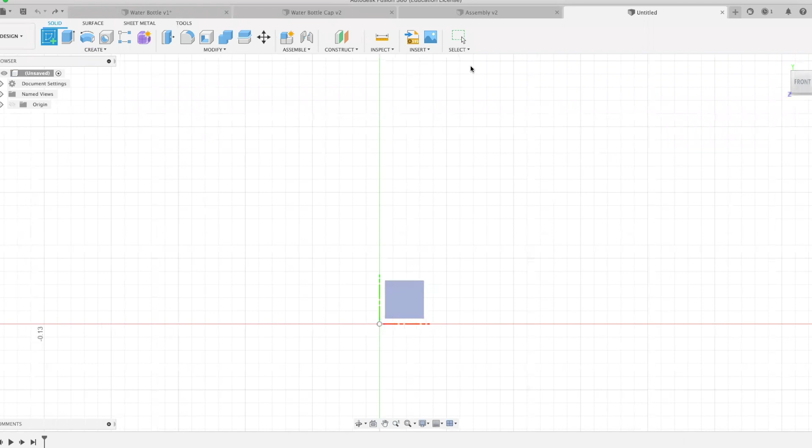So to begin, I'm going to create a new sketch on the XY plane, like that.

We're going to be using the revolve feature to create the water bottle, so I'm going to make about half the shape of it. I want the diameter of the water bottle to be 3 inches, so I'll make it half of that, so it'd be like 1.5 - 3 divided by 2.

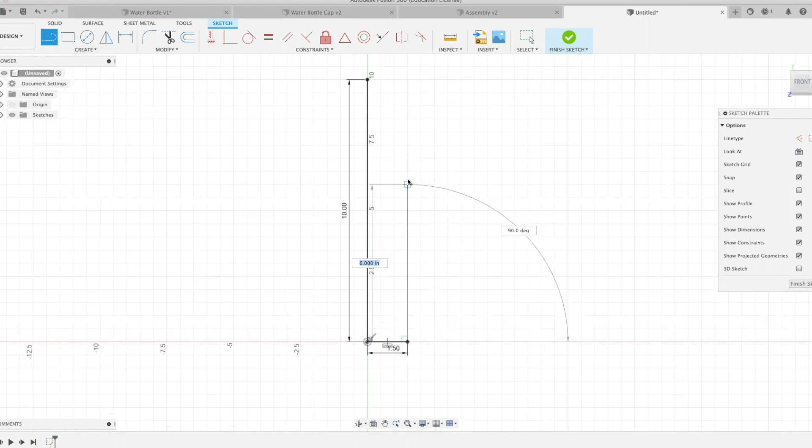And then I want the height of the water bottle to be 10 inches. Create a line like that, and I'm gonna make something like that.

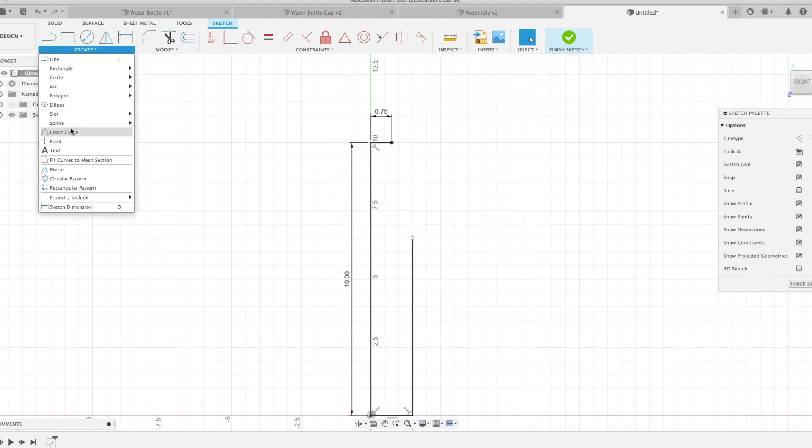And then this will be 0.75. To create that curve of the water bottle, I'm going to use the spline tool, specifically the fit point spline, so I can get more of that curved shape. Once you have it how you like, yeah.

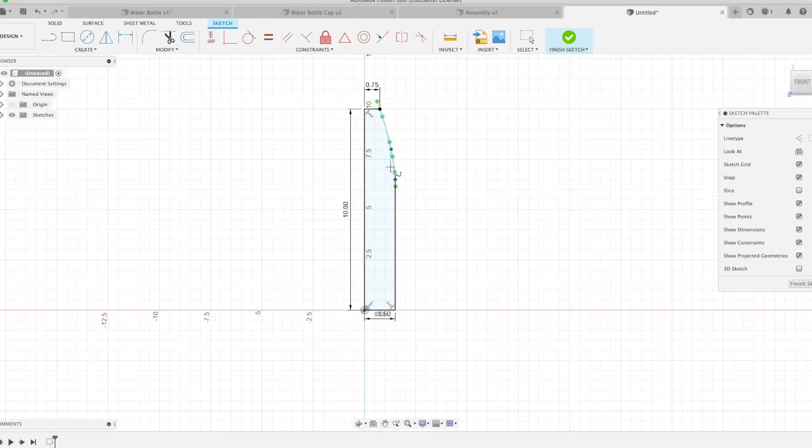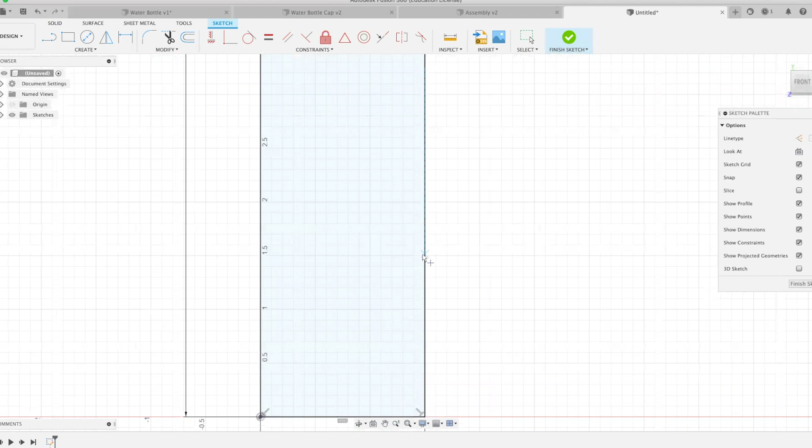There's also a small indentation for the bottom part of the water bottle, so I'm gonna make a little triangle right here for the indentation. I'm going to create a point probably right here, like that. Then we'll take the line tool, go like this. Under modify, you can find a tool called trim - it has a scissors icon - and you can just cut away the material right there.

Once you have part of your water bottle done in your sketch, click finish sketch, click on the shape, click on the revolve tool under create, and then click the axis - the axis will be this right here, where it revolves around. I'm gonna click that, and then...

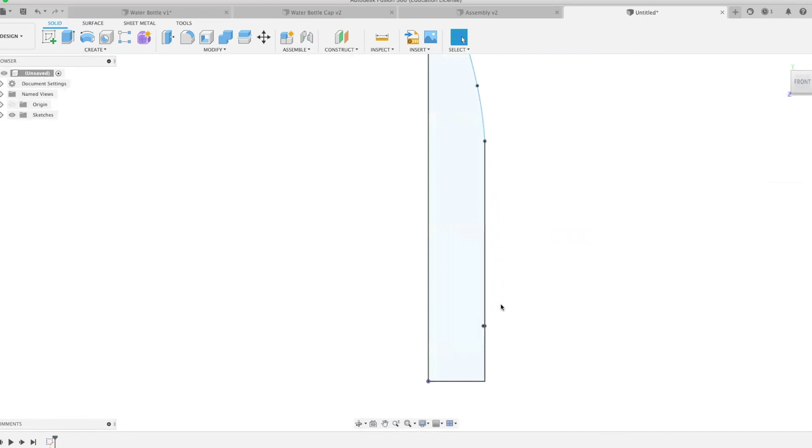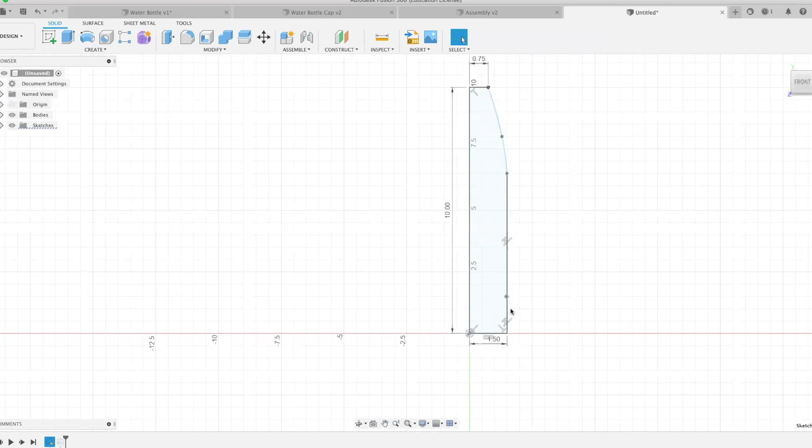Hold up, but yeah, I can just see it. Revolve, axis, click OK. See right here, my indentation is bigger than I anticipated, so I can just go back to the sketch and edit sketch, and quickly fix that.

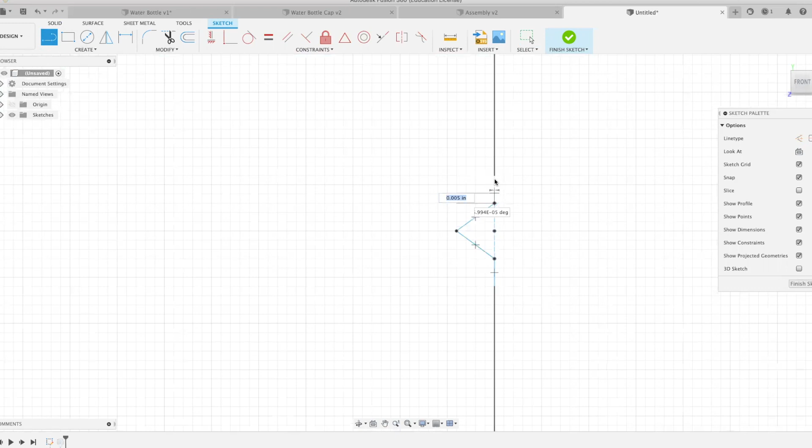So it can be more of something like that - yeah, that's kind of better.

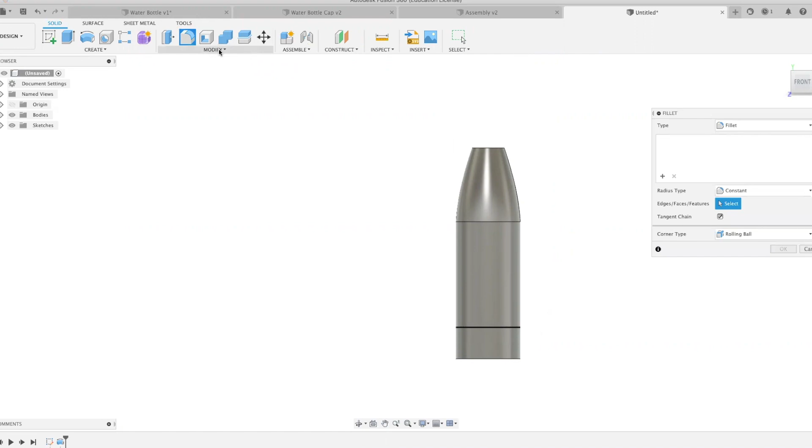Once we have kind of the shape of it, I'm going to select the bottom edge here and click on fillet under modify, click the bottom here, kind of just adjust it like that. Click OK, and then we can go ahead and make the top part of the water bottle.

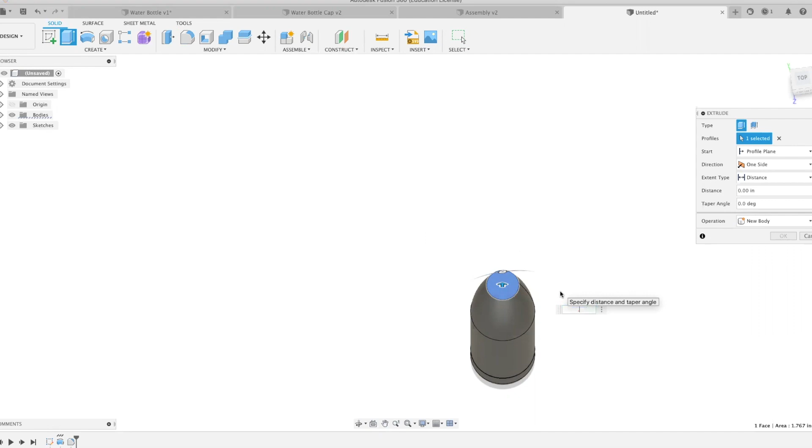I'm just gonna click on this and click E for extrude. To a point, let's see, do 1 inch and click OK.

So this is the base part of the opening of the bottle, but we're gonna make another thing on the top. I'm just going to create a circle. Your circle right now doesn't matter what size it is, because once we thread it, Fusion will change the size automatically so it works properly.

Then you're gonna extrude this as well - I think 0.5 is fine. Yeah, 0.5.

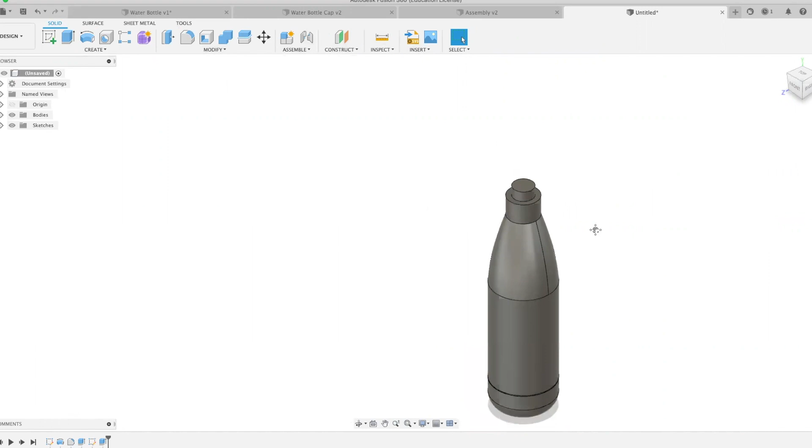And then we're gonna go ahead and shell the inside of this, just like how we did in the perfume bottle video. You click at the top opening. I want this 0.05, and then I'm gonna click OK.

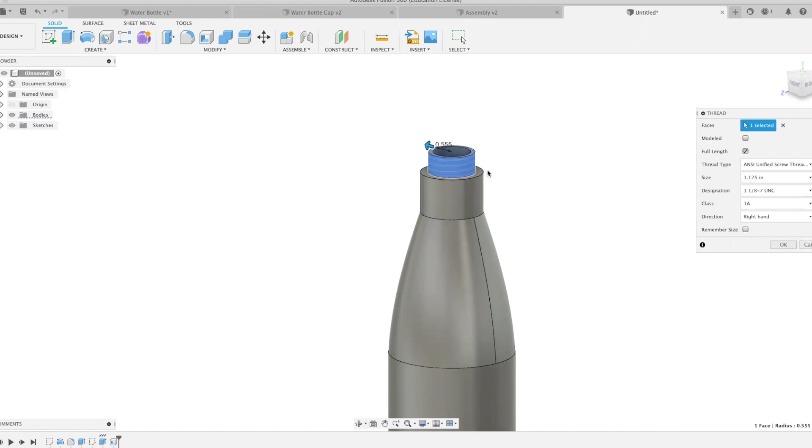So then next we're going to thread this opening. You just go under Create, click Thread, click the outside right here, and then I want the size to be 1.125 inches, and automatically it makes it larger like this. Then I'm going to click OK.

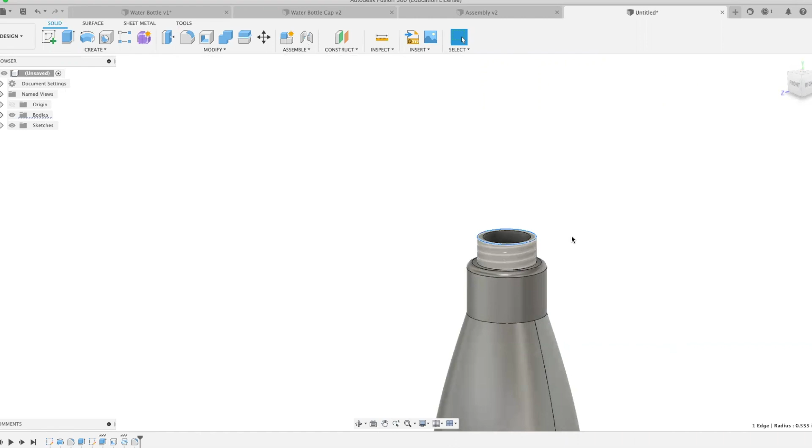Next I'm going to round these edges right here just so it gives it a nicer, cleaner look. I'm just going to move it until I like it, and then I'm also going to do this edge right here. Click on Fillet. There we go, and then click OK.

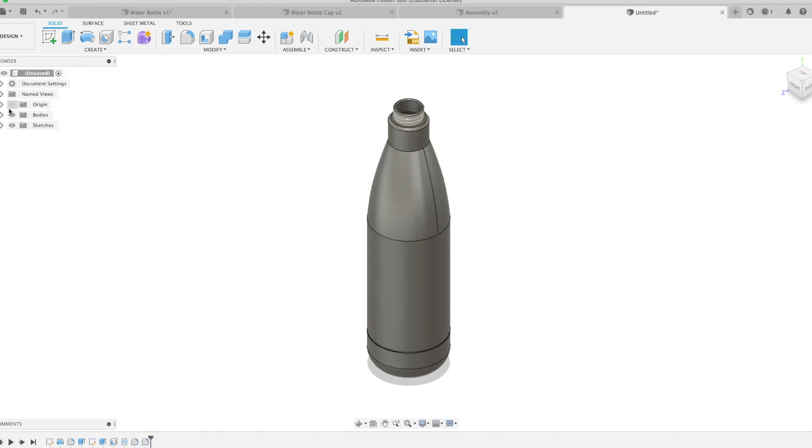Next we're gonna change the material and appearance of our water bottle. I'm gonna go under bodies, right click on body 1, go to physical material - it is a metal water bottle, so I think I'm just gonna do aluminum, just aluminum right on top, just like that.

Now we can change the appearance of the water bottle, so you just go under body, appearance, and you can do something like... let's see, under... how about, let's not do plastic, paint. Let's do a metallic-y color, you can throw it on just like that.

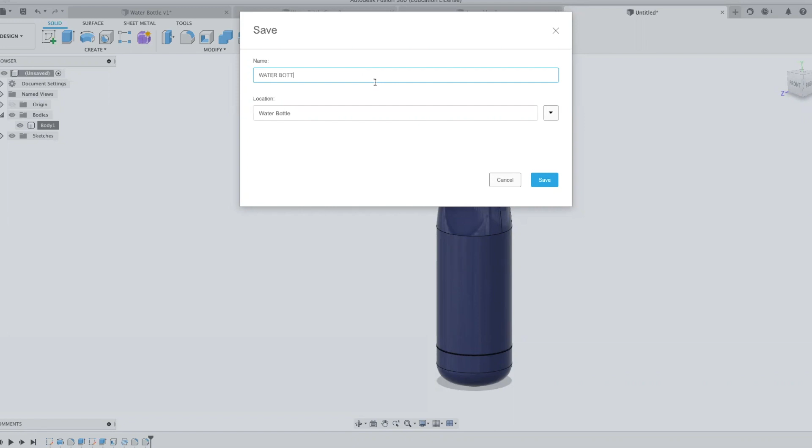So now that you have the water bottle, we can go ahead and save it - water bottle - and then create the cap.

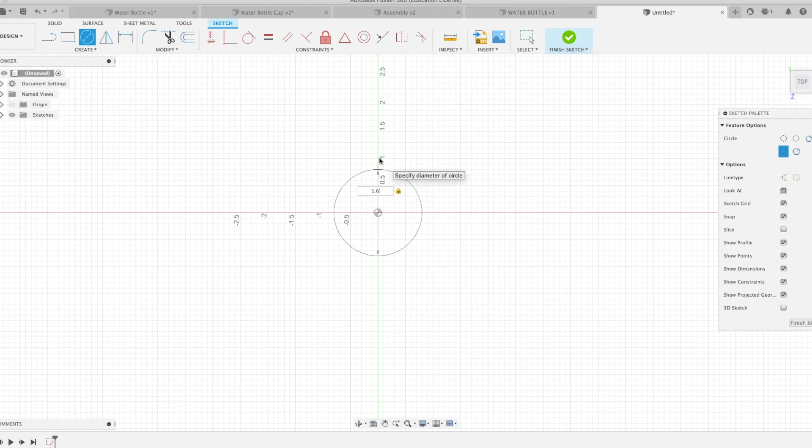Okay, now moving on to the cap of the water bottle. I'm going to create another sketch using the XZ plane, and then I'm going to create a circle - I am creating it's going to be 1.6. Enter, extrude, and then it's going to be 1 inch.

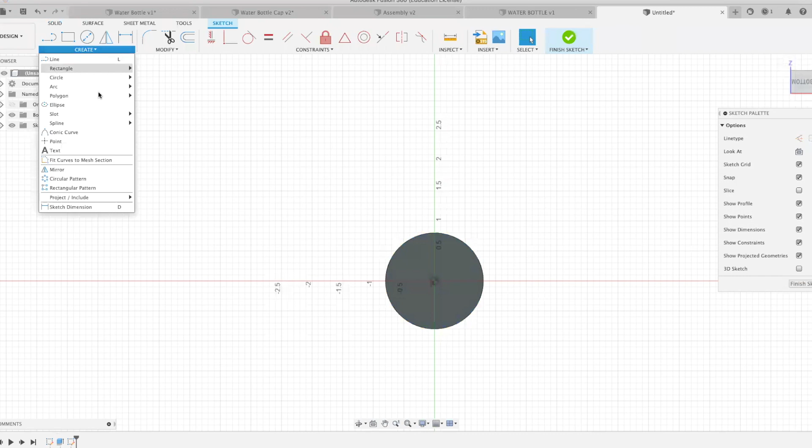Okay, so now we can go ahead and create the hole for the cap so it can screw and fit onto the water bottle perfectly. I'm just gonna go to the bottom, quickly create a sketch and make a point in the center like that. Finish sketch, so then we know where our hole will go.

So under create, you're gonna click on hole, click on that point, and then I already have the settings in and it's correct, but what you're gonna do is it's gonna be a simple hole. It's gonna be tapped, and then full, and the drill point will be flat. Then select the size that you had when you threaded the cap or opening, so it will fit properly. I'm just gonna click OK.

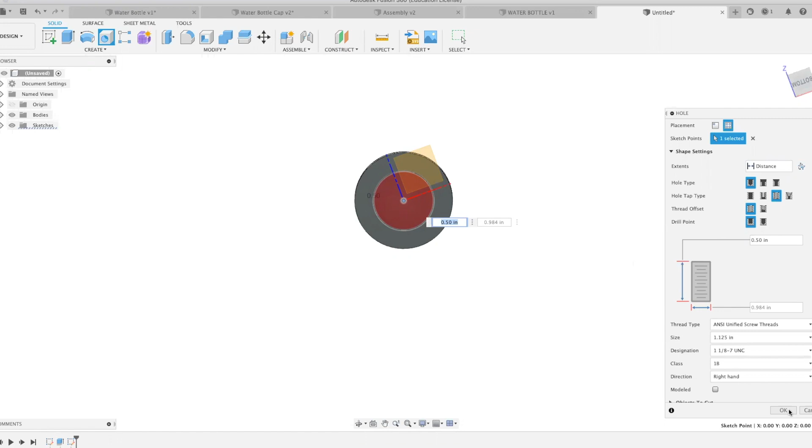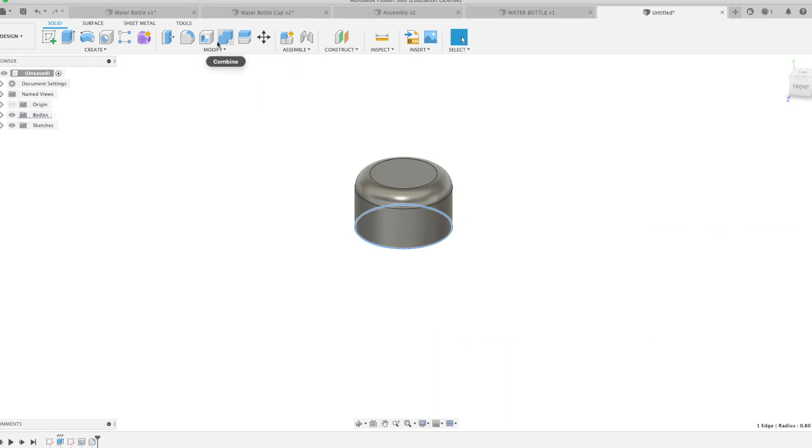Okay, so once we have that, I'm going to go ahead and round these edges. I'm just going to bring it in like that. Click OK, like this. Also round it. Yeah, just like that. And then click OK.

And then I can also change the material of this. So I'm just going to under bodies, right click, physical material. I think I'm just going to put the same material as before on it, aluminum. And then save it as water bottle cap. Click enter.

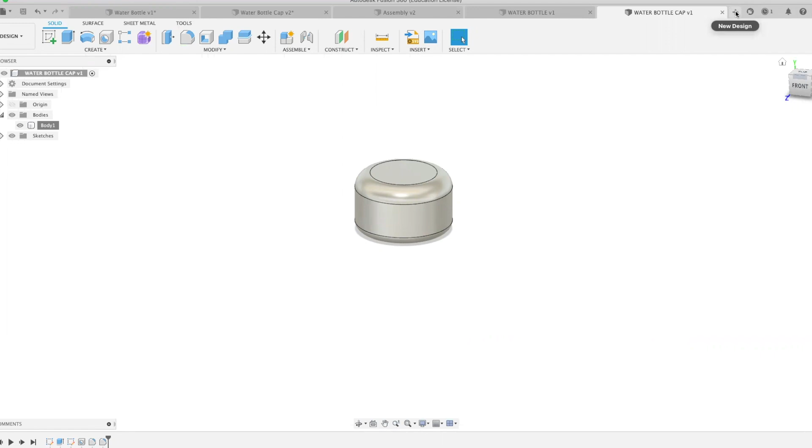And now we're ready to assemble. Okay, so once you're done with creating both the body of the water bottle and the cap of the water bottle, you can go ahead and make a new design and then save it. And then you can go ahead and call it like assembly or water bottle assembly, like that. Enter.

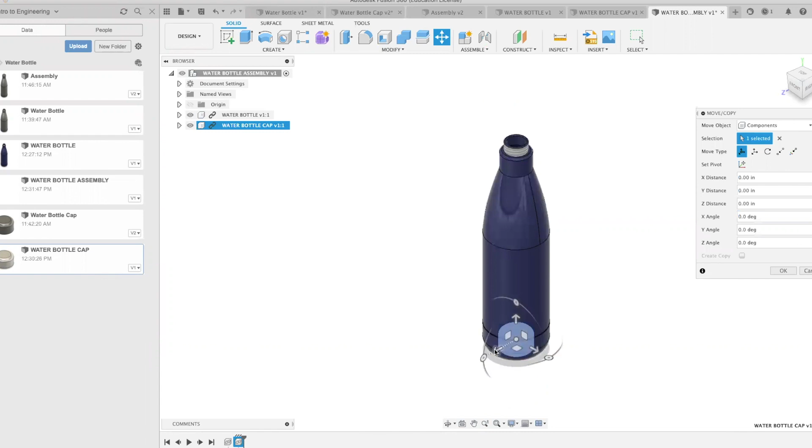And then we're going to go ahead, you can click and drag if you have a Windows laptop or device, but I have a MacBook, so I'm gonna insert into the current design by right clicking like that. Okay, and then do the same thing for the water bottle cap. I'm gonna drag it off to the side so it's easier. Click OK, and then now we can assemble.

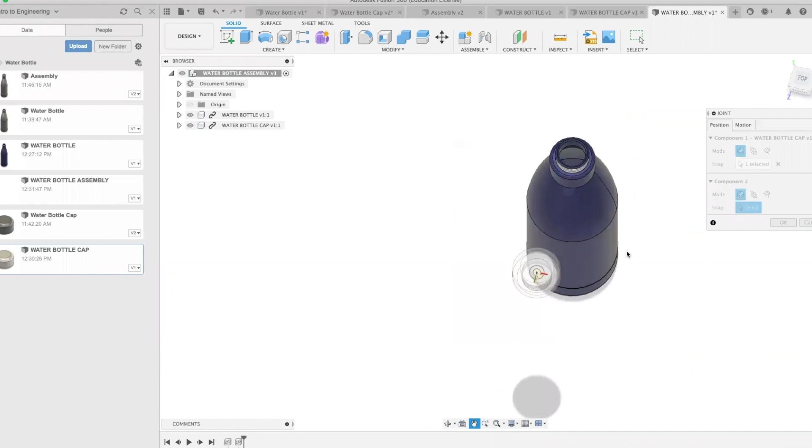So like the perfume bottle, we're gonna use the joint tool under assemble. Just click there. You're gonna click on the two points you want to join. So I'm gonna use this inside part of this cap and the top part of the water bottle.

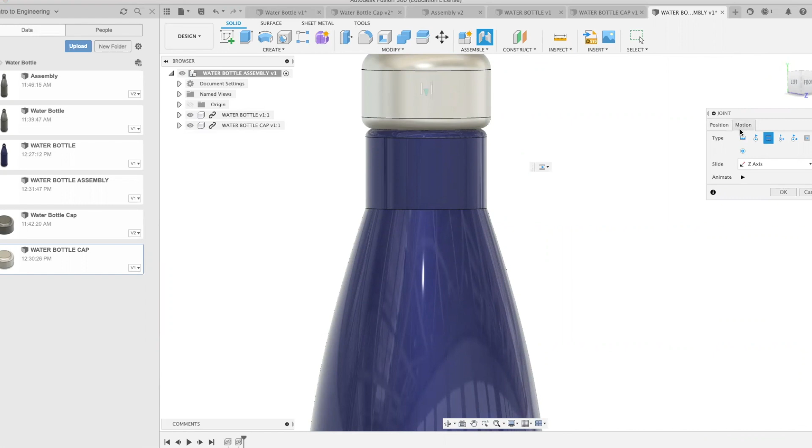Okay, so once it's on like this, you can also go ahead and add your motion or your type of joint. So it usually defaults to rigid, but I have it on cylindrical, because you can screw it on and off and it can go up. So to animate it properly, if you see it goes through the water bottle, just change the axis to custom.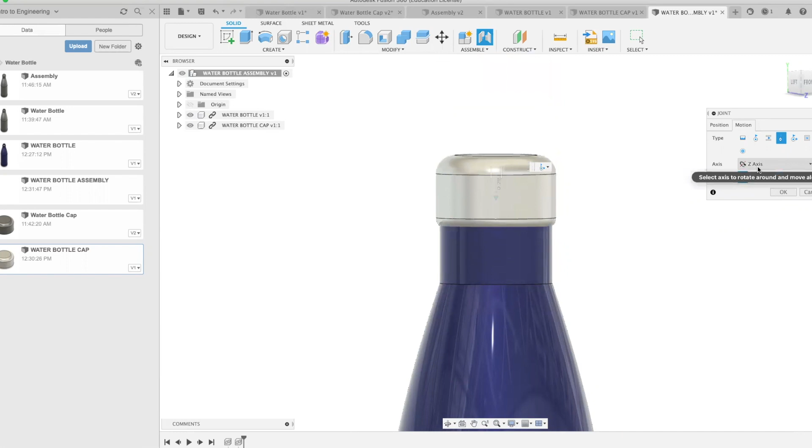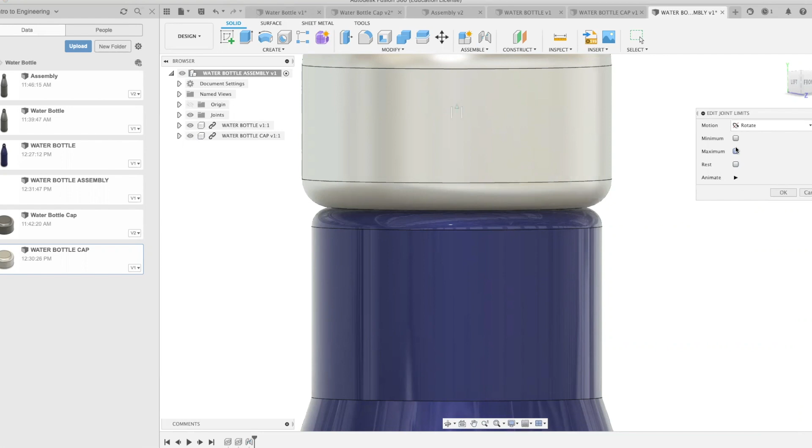Just select it like this, click OK, right click the joint you just made under the timeline, click edit joint limits, set a minimum, and it can just be 0 degrees, click enter. And then if you go to animate again, it should— whoops, that's not right. Edit joint limits, it should not be a maximum. I don't know why it's doing that.

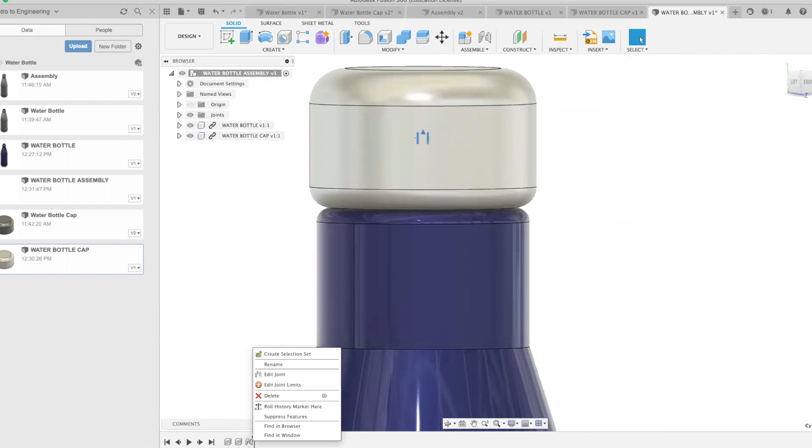Oh, slide. Yeah, change that to slide. Click minimum, you can select somewhere. It should just be 0, I think. Click enter. And then let's see if it works now, because it should work. Okay, yeah, so now it works. So if you can see, it is rotating as well as going up and down, just like how you would screw it on and off.

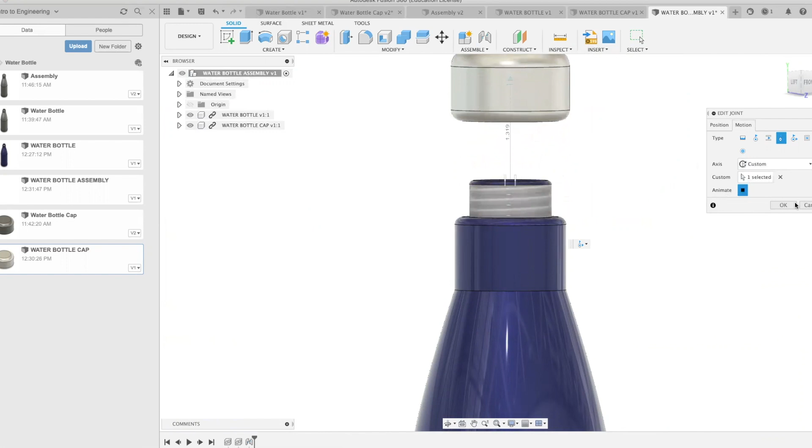So then I'm going to click OK, and then we can save it. And there you go, you have your water bottle.

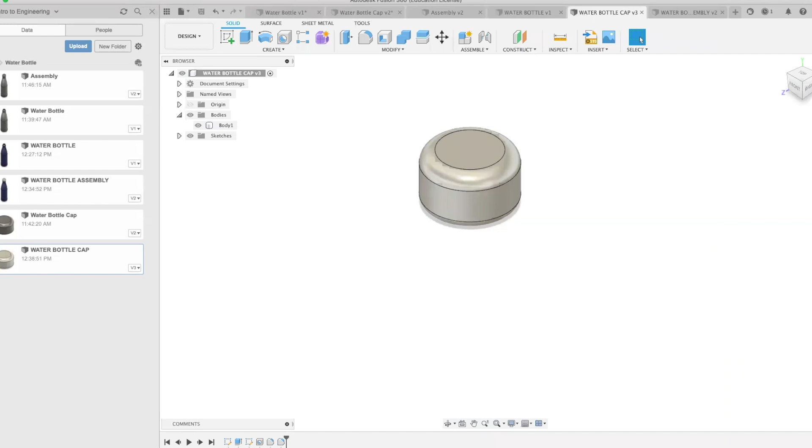Okay, so once you guys have finished assembling your water bottle, we are going to create the multi-views for them. So I'm going to first start off with the multi-view of the cap because I believe it would be a lot easier to dimension and see all the different dimensions.

First thing I'm gonna do is we're gonna need a front view, a top view, and a right view. So since we have a hole at the bottom here, it'd be much easier to dimension the hole if this was the top view. So it doesn't have to be the orientation of how it naturally is placed, it can be changed. So I will be changing the orientation of everything.

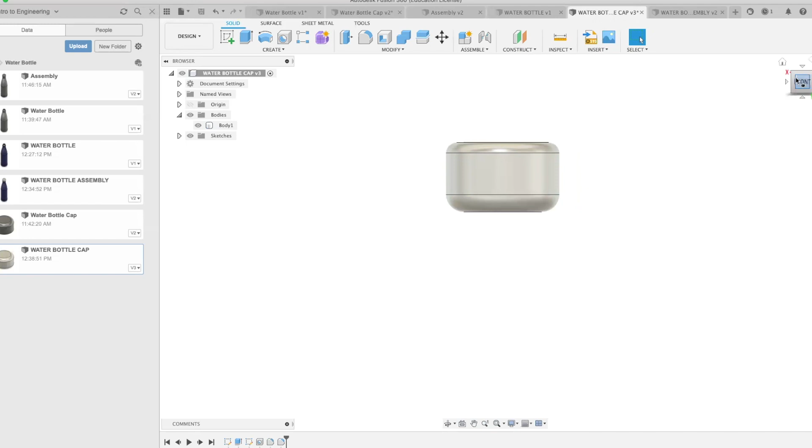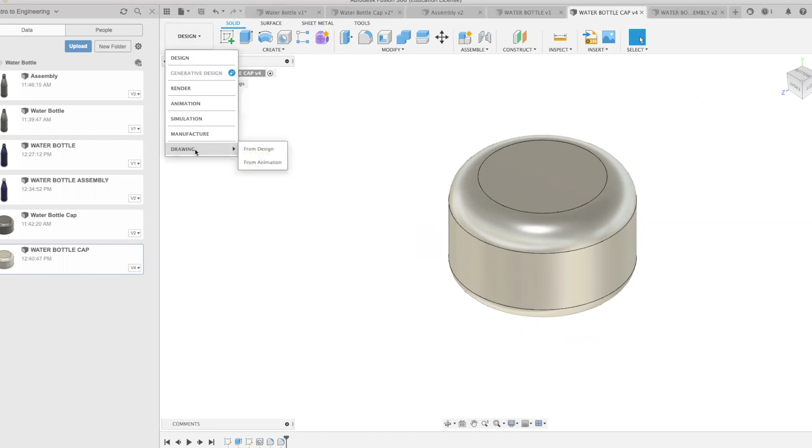So I'm gonna make this the new front view, so I'm gonna set current view as front view. So then this would be top. Okay, perfect, and then save. Okay, so once you have the orientation of where you want your object to be, I'm going to go ahead and click on design, go to drawing from design, and then we're going to create our drawing. I am using the Walton drawing template, but you can just create one from scratch, and click OK.

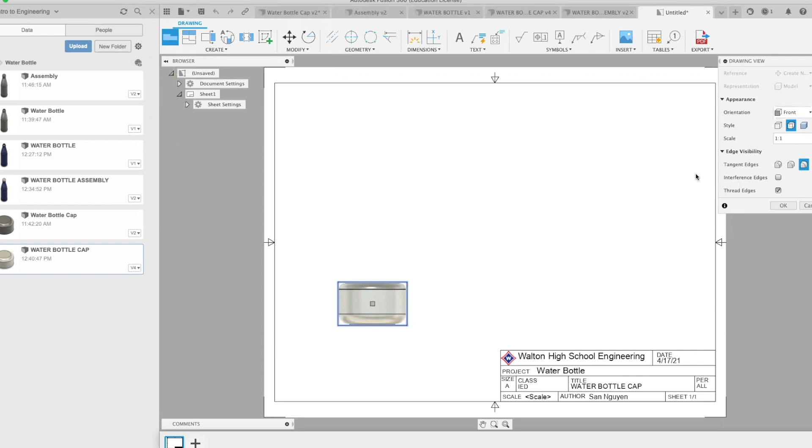So to create your multi-view, first you want to place your base view at the bottom left corner, like this. You can change the scale, you can change the orientation from here as well. And then I'm gonna click OK.

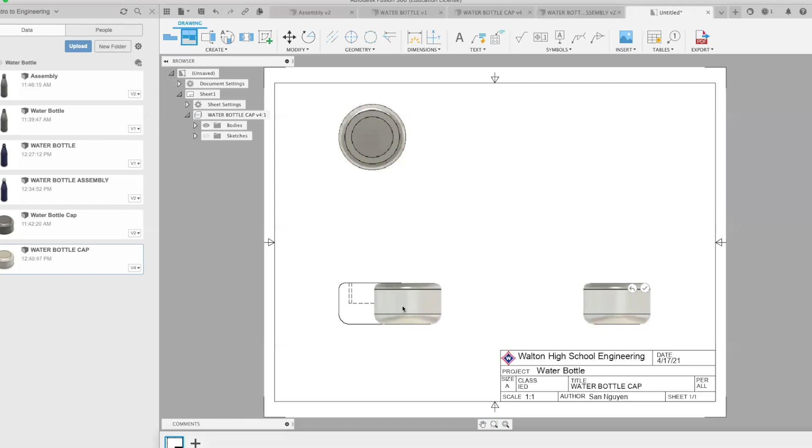From here, I'm gonna click on projected view, click my base view, and then we're gonna create our top view by dragging it up, our right view by dragging it to the right, and then our isometric view. I'll put a check. For the isometric view, you can double click and change it to shaded because we're not going to be dimensioning this. This is just like a representation of our object. And then we'll click close.

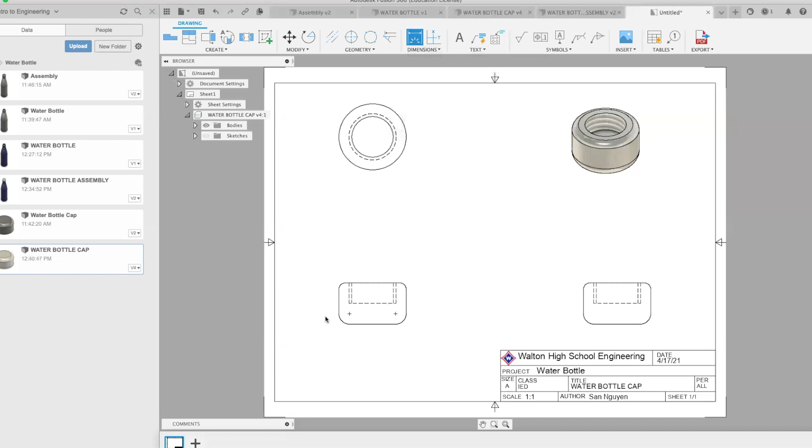Okay, so to create a dimension, you can go right here under dimensions and just click the icon dimensions. And if I wanted this height, I can click the bottom line like this to the top line and drag it to the right. Now we have our overall height.

So to dimension a hole, such as this one, the first thing you want to make sure is to create a center mark. That's going to be like an X in the center. So you click on the outermost circle shape you have, like that, and then you have your center mark.

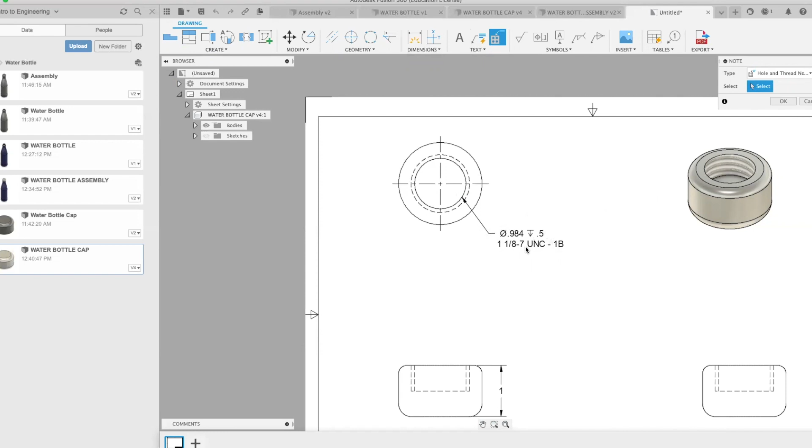From here, you can then dimension it. But instead of clicking here, you're gonna go under text and it's gonna be hole and thread note. Click on this. I'm gonna click here and do it like this, then place your dimension. So here it will have the diameter of your hole, how deep it went in, and what it was threaded by. And I'll click OK.

Next you want the diameter of this outside part. You could get it from here by doing this side and this side to get the overall width of it. But since it is technically a circle, it would be better to dimension the circle, so you'd get it as a diameter. So you can just go to dimension, click on the outside like this, and then it has the diameter symbol right here. You don't need it twice, so you don't have to do the overall for this one.

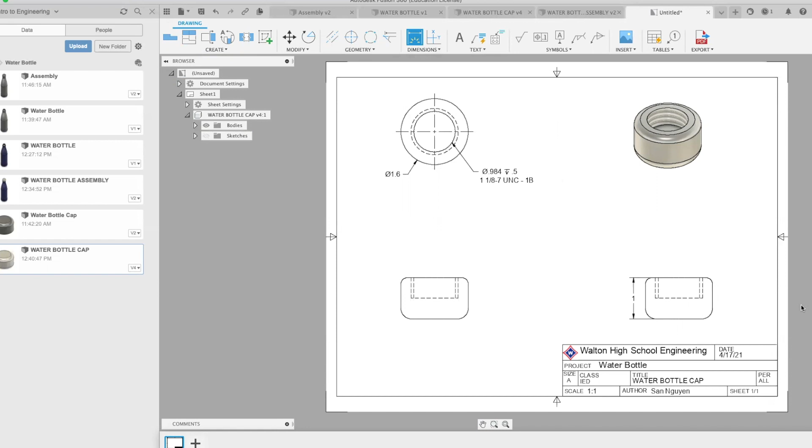Okay, we can also dimension the rounds or the fillets. I'm going to actually move the dimension of the overall height over here to make it easier. But we can go ahead and dimension these sides like this and click the bottom here like that. So once it's fully dimensioned, you can go ahead and save it.

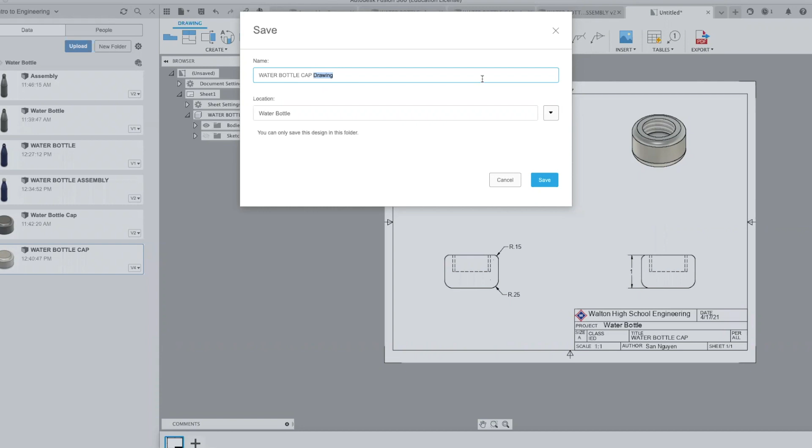I'm gonna save as water bottle cap multi-view. And click save. And then we're gonna do the same thing with the water bottle itself.

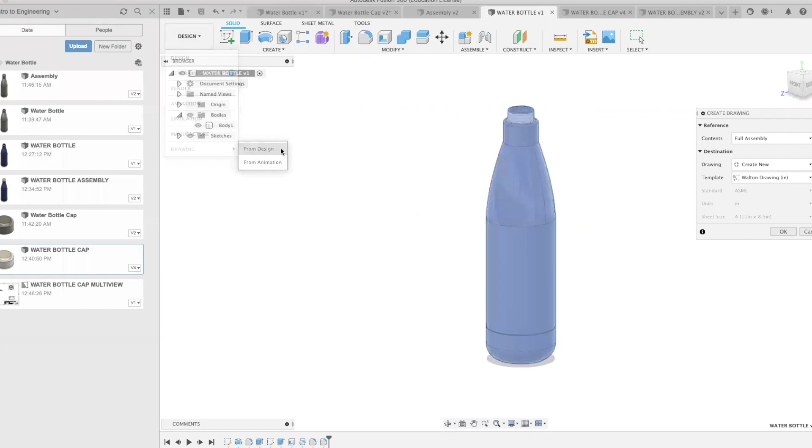So with the water bottle, we're gonna do the same thing. We're gonna go back to design, drawing from design. Whoops, it does not want to collaborate with me from design. And we're gonna create, click OK.

We're gonna place it. I'm gonna change the scale size a bit so it's a bit larger, like that. And click OK.

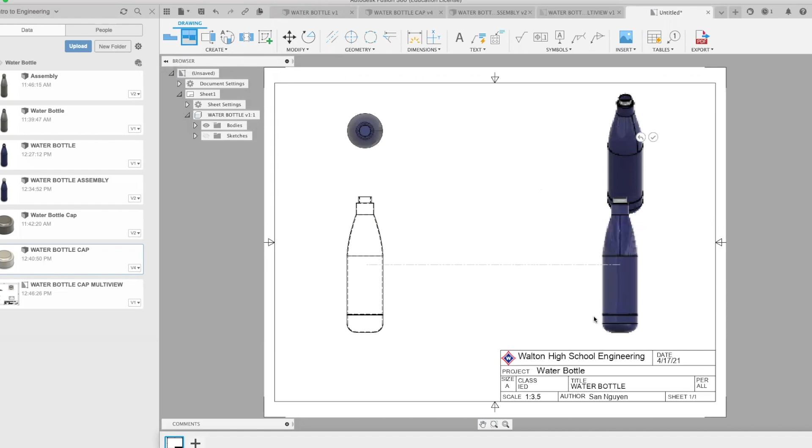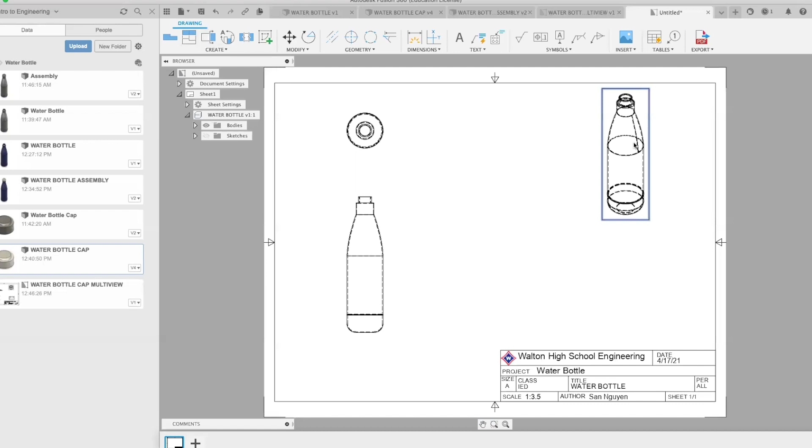And then we're gonna do projection of the base view. We get the top part, isometric, and then the right. So if you see here, the front view and the right view are identical, so the right view isn't necessary, so you can just delete it. So then all you'll need is the front view, the top view, and then the isometric. I'm going to change this again to shaded, click close, and then we can dimension this.

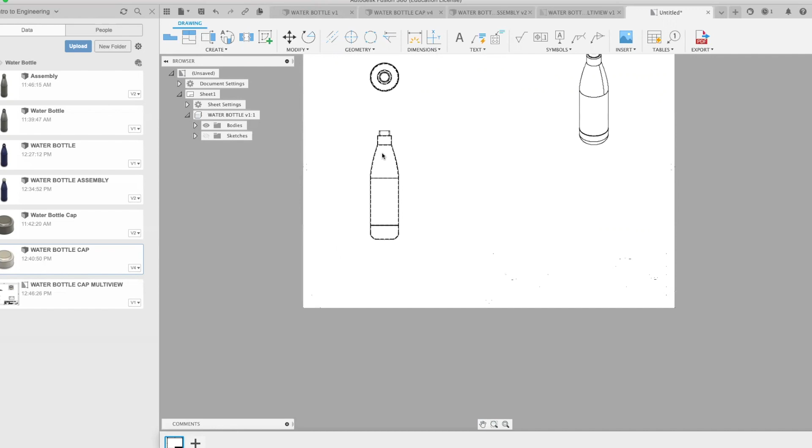So if you remember, the dashed lines here are the hidden lines. These are what you cannot see because there's empty space in the center. If you remember how we shelled the inside, what you can do so you don't have to see all the shell or the hidden lines is turn off the hidden lines, but you still need to know that they're there.

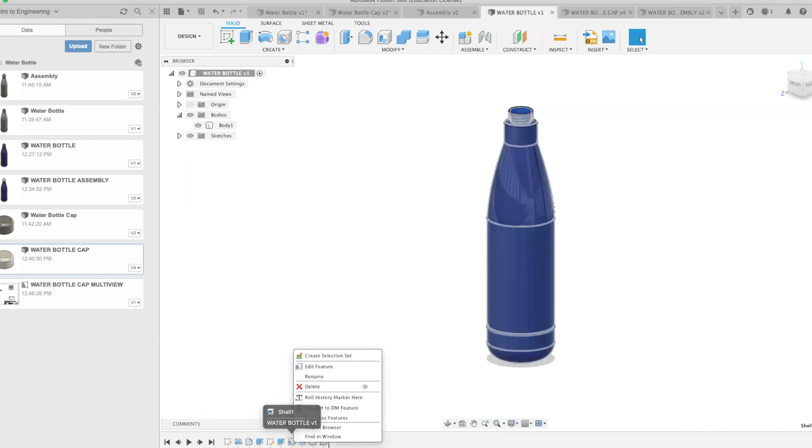So you can just create a note at the bottom left of your drawing or your multi-view. Let's go back to see what the shell was. Okay, so we shelled it 0.05. So you can just write that.

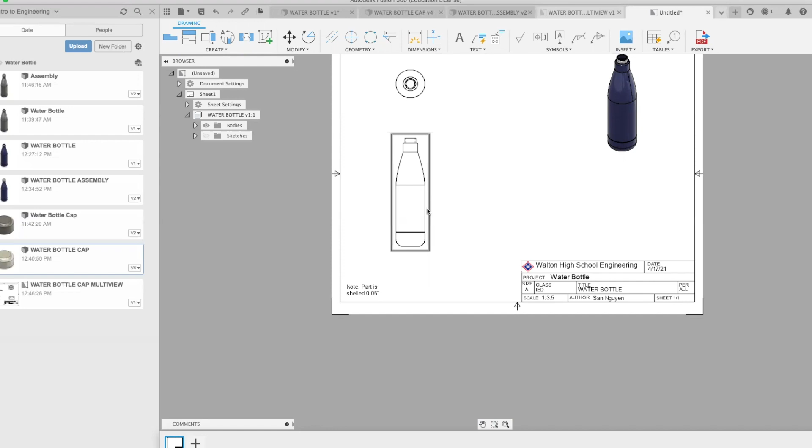So you can go down here, go to text and then add text like that. You just put a note, saying part or object is shelled 0.05 inches, and you just leave it like that. So then you know that it is empty in there.

Okay, so once you have your note here, we can go ahead and start dimensioning our object.

When you make a multi-view, you can also make different views, such as a section view or a detail view. I think what's necessary is going to be a detailed view so we can show the dimensions for this tiny part right here.

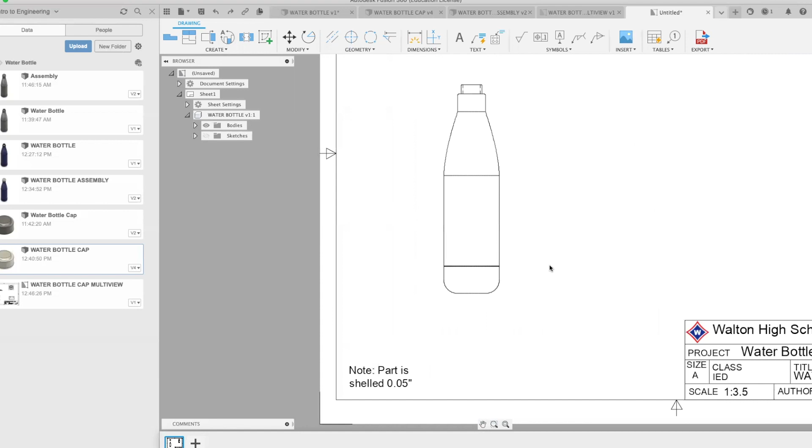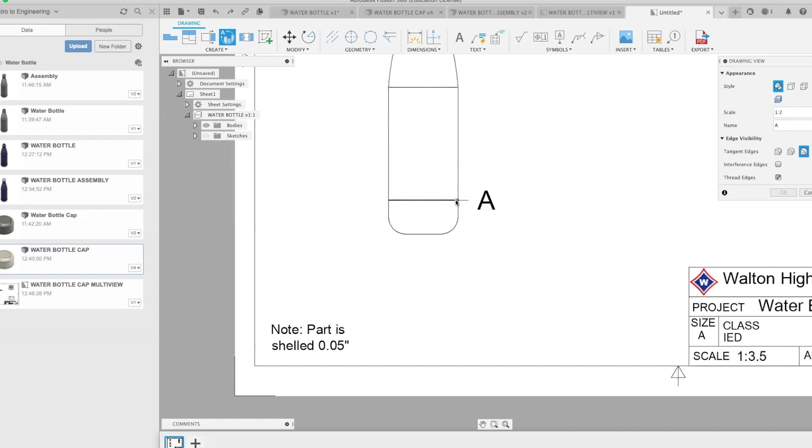So I will show you how to do that. We're gonna click on detail view, go to this corner right here, select the parent view, click right here where we want it, and you only need to show as much as you need to dimension. So just like this. Since we don't have a right view, I can put it in any area over here, or something like that. And then click OK. So this is very, very tiny.

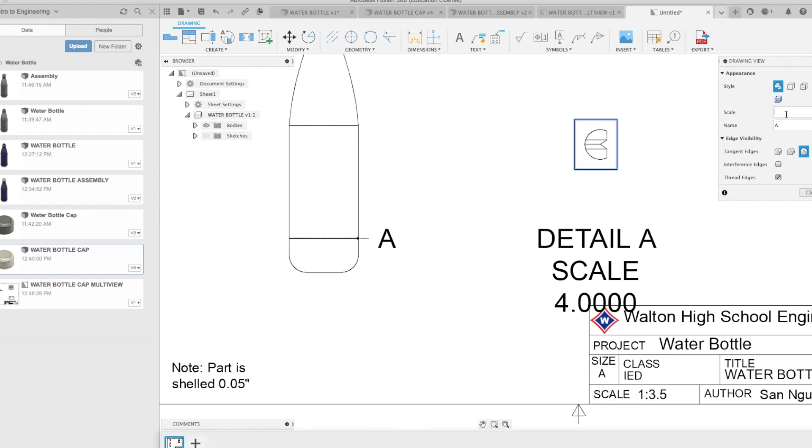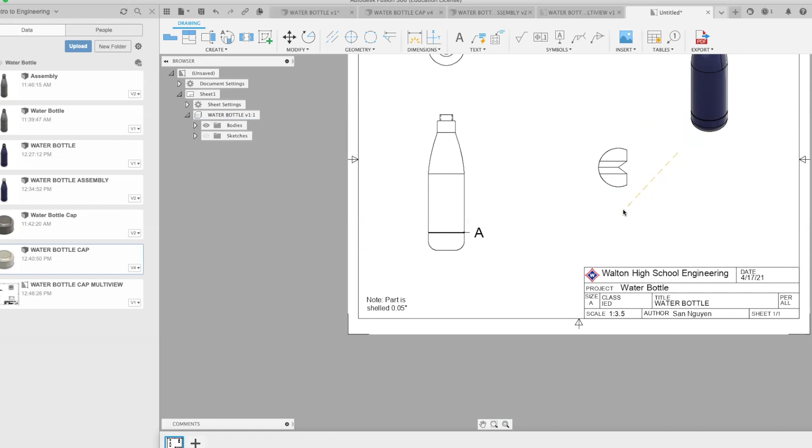I'm just going to switch up the scale to something like this, it could be bigger, like that. So you can adjust it, place it wherever you need it to be. You can also put its label under it, next to it, and then move it all around.

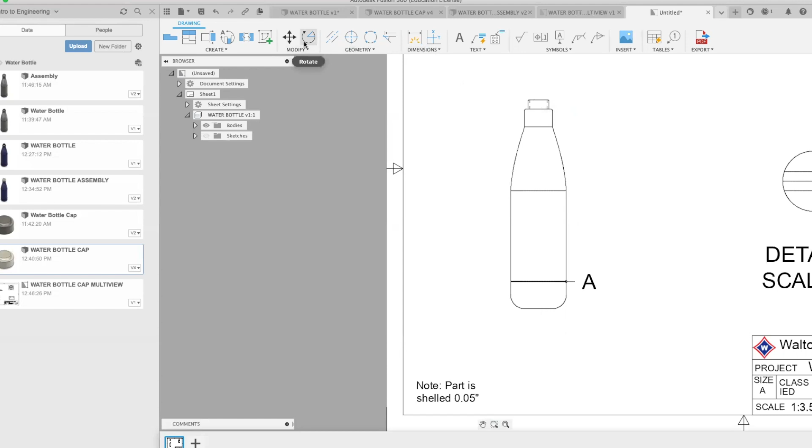Then we're going to dimension that after, but first we're going to dimension the front view. In the front view, we can dimension the overall height. Actually, before doing the overall height, we can do all the smaller heights. So you can do the height right here. I'm just going to do the center part, like that, and pull it to the side.

We're using datum dimensioning because it's more accurate when you manufacture a product, and it's preferred over chain dimensioning. So that's what we're going to do. We're going to pull this to the right, bottom here, and then this one here, and then you also get this one here.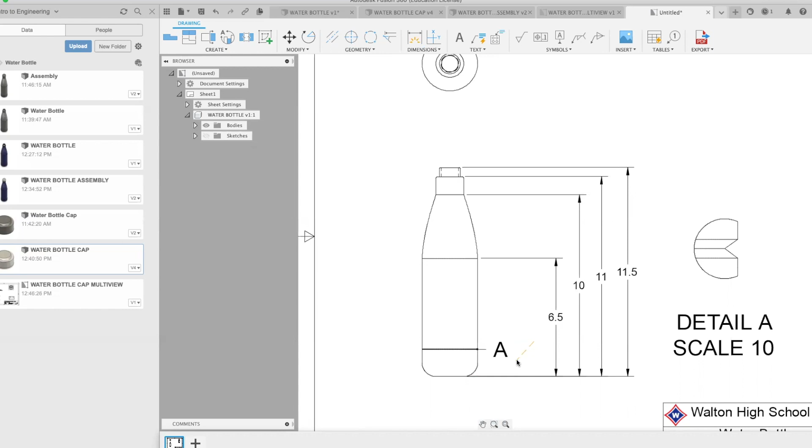You can also switch the spacing so it's much nicer, and make it a little closer. Just like that.

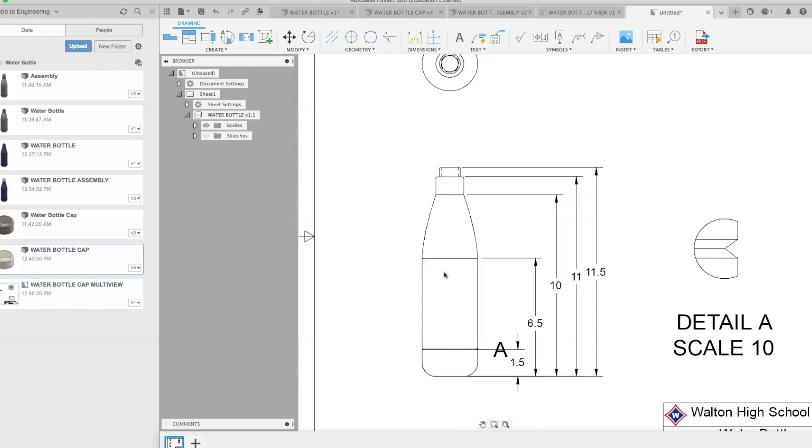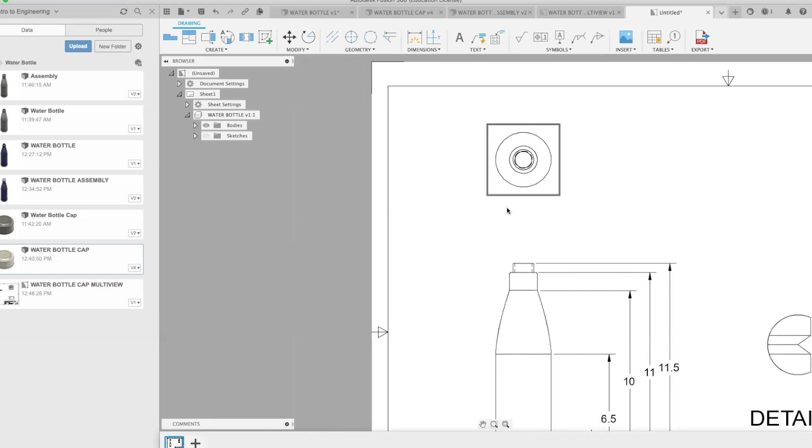As for the width of it, we can just do that on the top view where you can see it as an actual circle, because they're technically diameters. So if you go up here, since this is pretty small, you can also scale this up if you want.

I can make it—that's way too big. Like 1 to 2, like this. But make sure, if you want to scale it up so you can see it better, you have to put text somewhere showing that it's being scaled. So right here, I can just put scale, and then the new scale I put as 1 to 2.

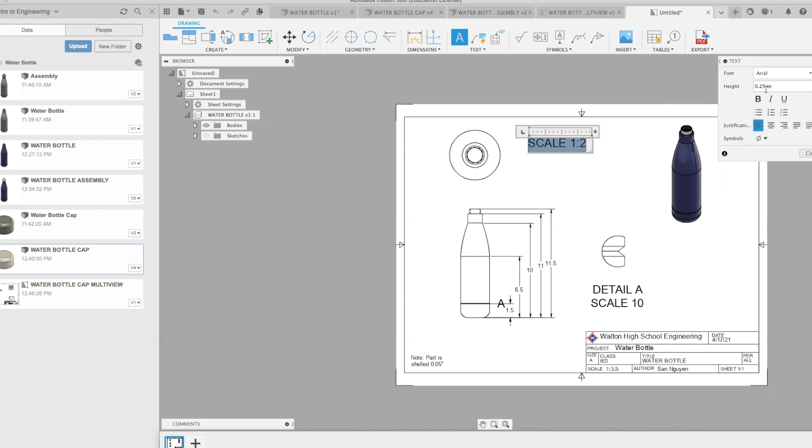I'm going to increase the size like that. So now you can tell that it is scaled up.

Again, we're going to create the center mark. I'm just going to click on the largest circle, this one, and then we can go ahead and dimension these. This is a thread right here.

So it's threaded, you can just click this and do the inside part. But I'm actually going to first do the outermost part. I'm just going to dimension this right here, dimension this one right here, and then we can do the thread.

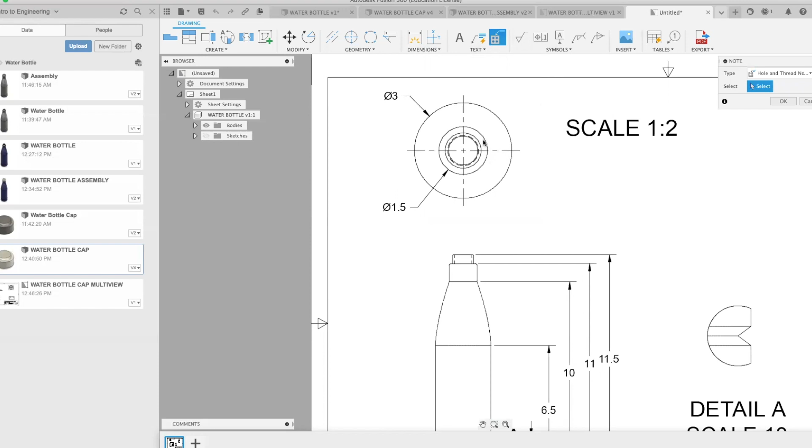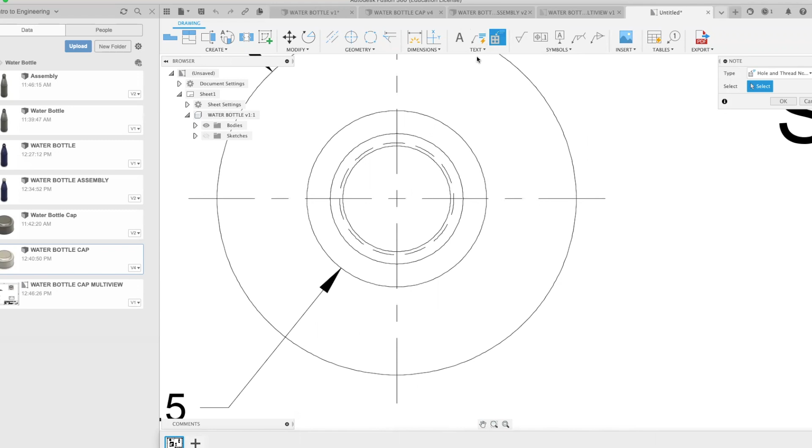So what you can do if Fusion doesn't want to dimension your thread for some reason, you can always just do a leader note like this, and manually type it in. This one was 1 1/8-7 UNC, and I'm just going to close.

If you're wondering what your thread is, you can just go back to your water bottle, go back to your timeline, right click your thread, edit feature, and see what it is. Like right here, it's 1 1/8 dash 7 UNC.

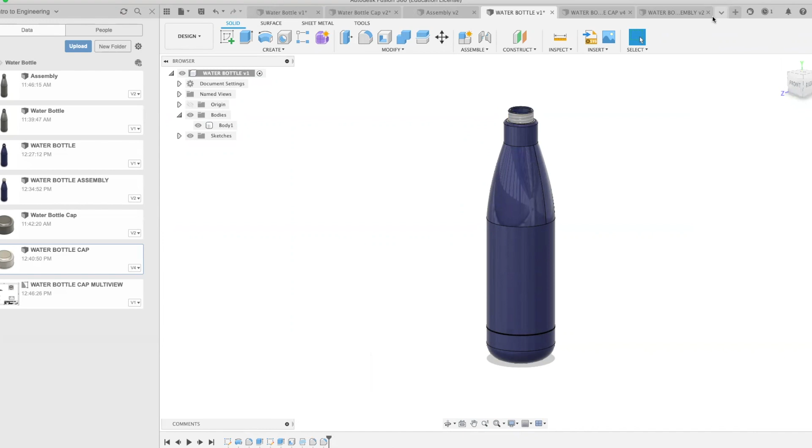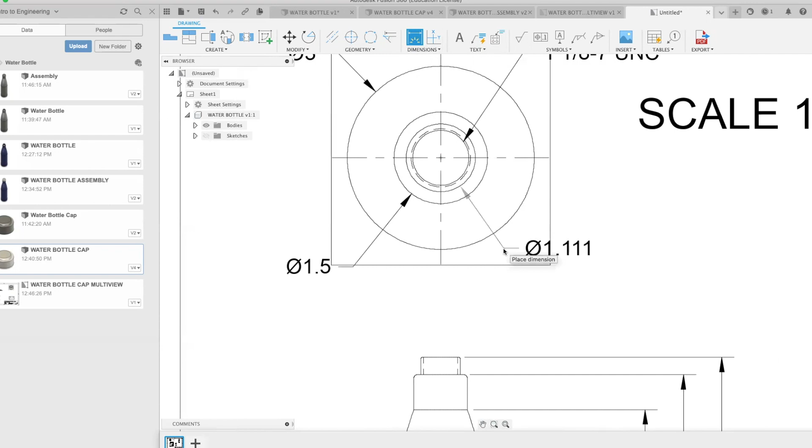And that's all you need in the multi-view for the threading part. But then you also need to dimension this right here, I believe. Not that one, this one. Like that. Okay, exit. I'm just going to adjust this so it looks more even.

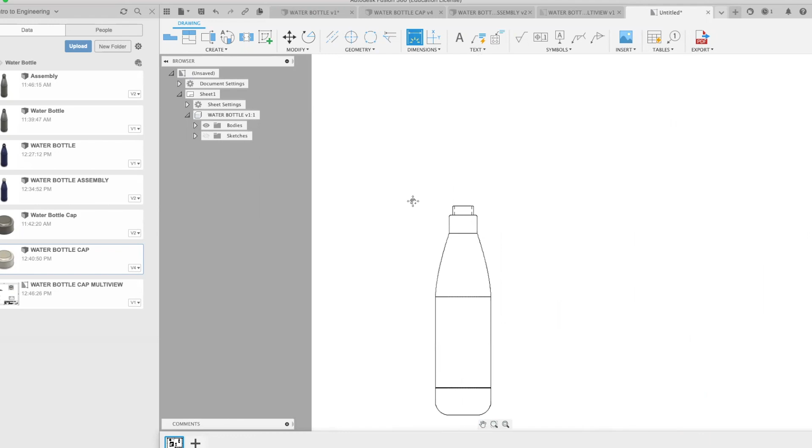One thing I haven't dimensioned yet is the rounds or the fillets. So we can just click here. The fillets are always going to be a radius. So you can just do that. Like that. Like that.

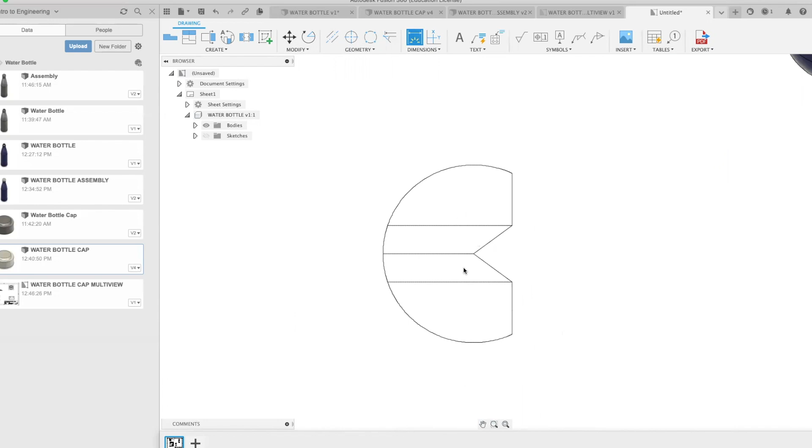Okay, just like that. Now moving on to our detail view. For the detail view, you can just dimension it so they know where it is, I guess. So you want it to be from this point to this point, but like that. And then you can do something like this.

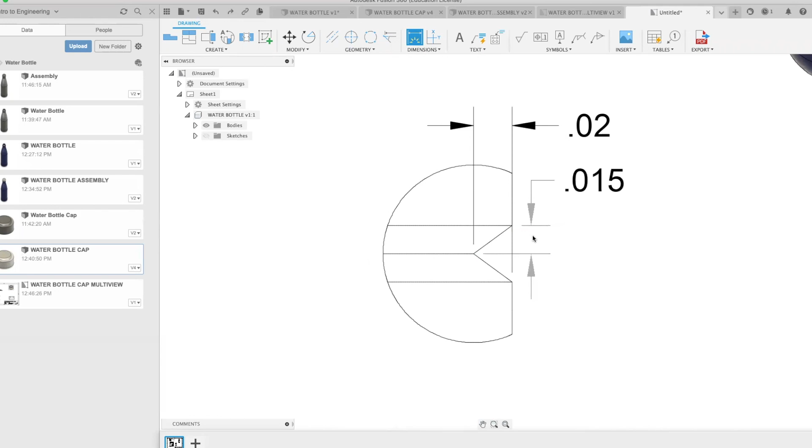Something like this. So you want this one, drag it to the side, do the overall one for datum, because that's how you do datum dimensioning. And then, yeah, that's all you need.

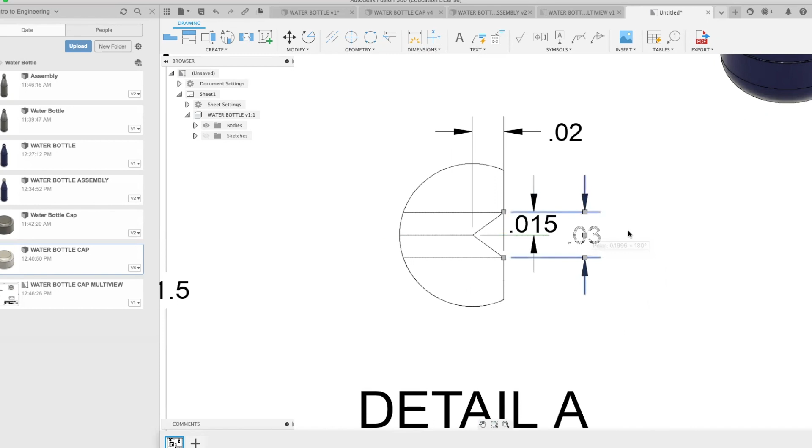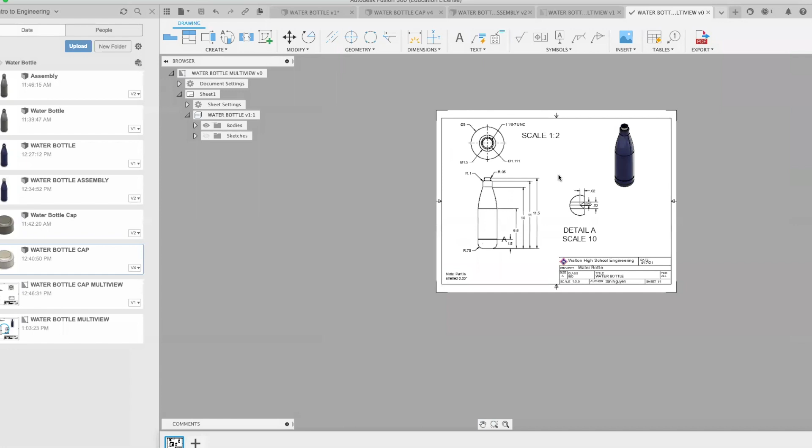Let's see if we can drag this so it's in the middle, in between. I don't know if it'll fit. Yes, it will, just so the appearance is much nicer. And then you can save. Let's save this as water bottle multi-view. Click save, and then you have your multi-views.